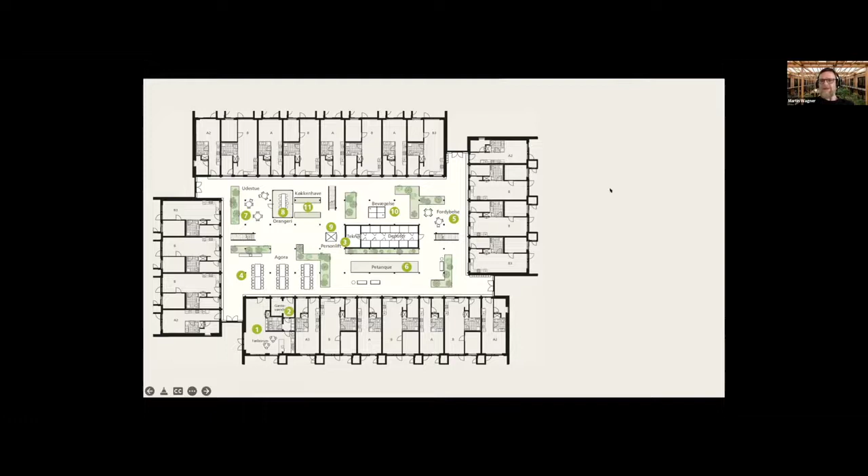So we have created small, compact, personal privacy cells, not cells, but apartments. And then we've created the big atrium garden where people can actually meet. Now, there we go. Here you can see the layout. This is a general layout, and I've just quickly translated it.

You have the common room, down at number 1, where you can have a gathering of up to 30 people. The reason we haven't made it bigger is that with a bigger gathering, you lose the intimacy. It's not supposed to be that everybody meets everybody every night. That's not the whole idea. The whole idea is that you can have small communities within the big community.

And when you have a compact apartment, one thing you lack is a guest room. You don't use it very often, but when you need it, you need it. So therefore we have a common guest room. The interactive board I'm going to skip, but then we have the Agora. And that is actually the big wide open space where you can gather more than 30.

You can have standing gatherings if you want to gather the whole community or part of the whole community, or you can have sitting gatherings where you can have guests, for instance. And then we have different zones, like the reflection zones, the lounge area, the activity zones, and the kitchen garden. Because the common area also has to be a place where you do something.

You grow your own herbs. You have the boule lane where you can play boule. And then you have the different areas where the inhabitants are actually taking care of the community. So we don't create the community, but we facilitate it by the building design.

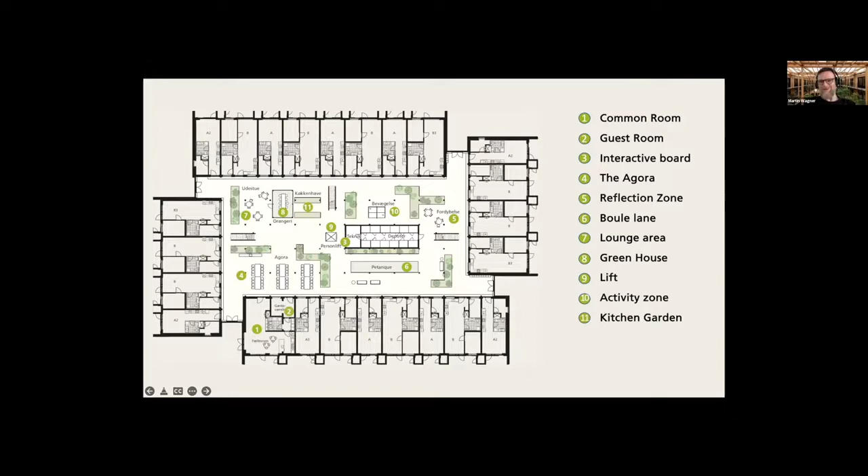All right, Morten, will you take it away, please? You're still on mute, Morten, or is it the video, Zach? Yeah, Morten, would you like me just to go straight into the video? You need to, yeah, so okay. You unmuted me, thank you. Okay, thanks a lot. And I guess from the introduction Hugh gave me, I can only fail from here.

But okay, Martin's already told us a lot about the project, and now I want to show you how the prefab modules are being built. So we've visited the prefab producer FlexModul here in Denmark, where you'll see Brian, the technical director of FlexModul, and we'll go through the production and show you how things are done. And then afterwards, we'll also visit the finished project Ibihaven. So enjoy.

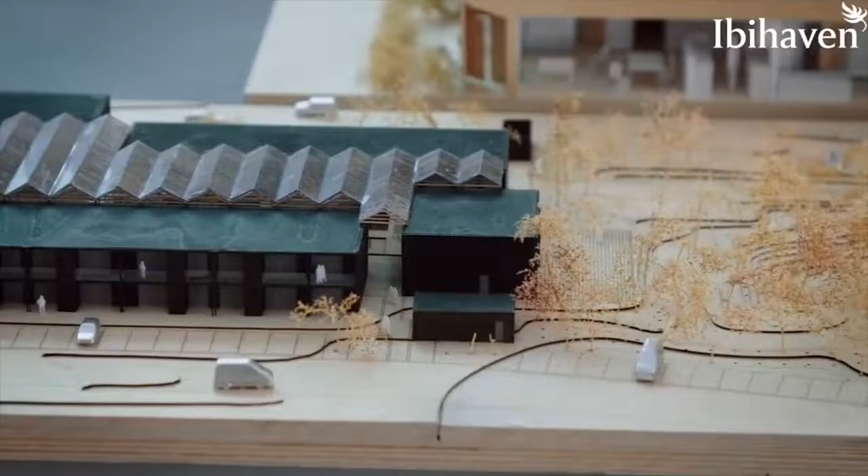Today we are here in Slagelse visiting the project Ibihaven, which is part of the bigger project called Agorahaverne. Haverne means gardens. As you can see, this is somehow an inside atrium garden. This project was built in 2020, so the people here have been here for 2 winters now and had different experiences with warm summers and a bit cold winters out here.

But inside, the different apartments are of course built as we do in Denmark. When you build and calculate your energy consumption, if you follow the standard and you build to 1.0, then you need to do the blower door test. If you build at 0.7, you need to test. If you don't test, you need to calculate at 1.5 instead of 1.0 or 0.7. And no matter what, you still need to comply.

So even though you use 1.5 in the calculation, which is kind of a penalty, you need to do something else with insulation and so on; you need to reach the level 1.0. So in this project, we have 150-plus apartments, and every apartment is tested individually and reaches 0.7.

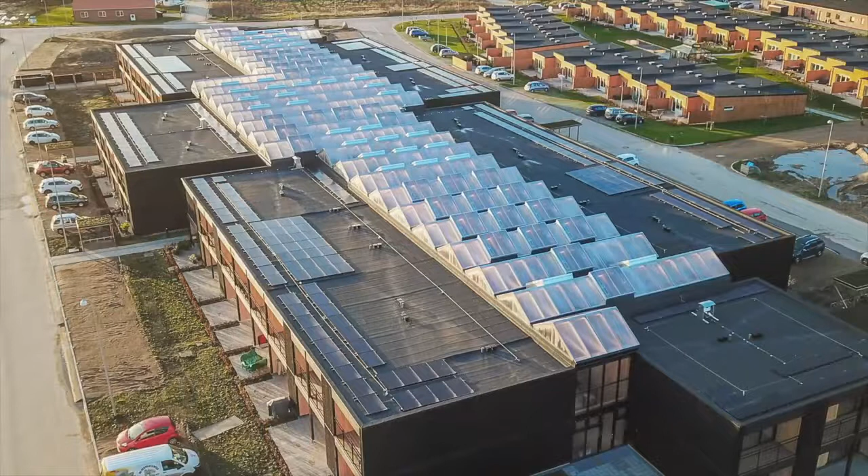Because of the incredibly low energy consumption, it's possible here to heat the dwellings only by the ventilation system with an additional heating coil. Another thing is, in this project they've installed PV on all the flat roofs, and the residents can follow the energy consumption in real time on a screen. So all the time they can see what is being used and what is being produced by the PV.

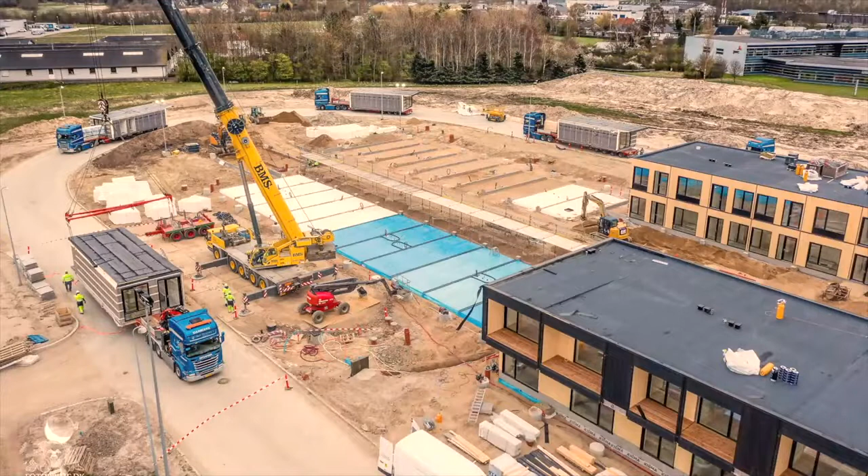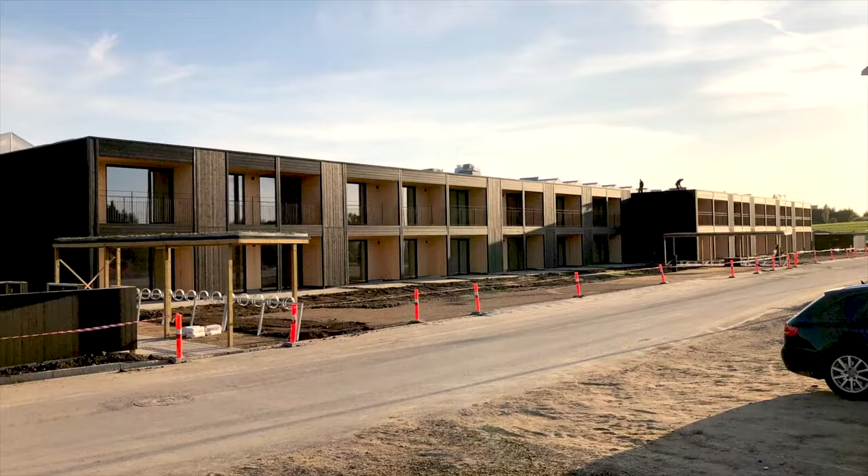And as you saw earlier, FlexModul are building these prefab modules in the factory. But they don't only build them, they also do the installation here on site. Because the prefabs are more or less 90 to 95 percent finished from the factory, it makes it very efficient also when installing. So they can actually install up to 20 modules a day.

And again, it's very efficient and, I don't know if we can call it a clean installation, but safe, because in the factory the elements are wrapped in plastic, and they drive them to the building site, install them, and then remove the wrapping just before putting the second or second and third floor on the ground floor. So you have no problems with rain coming down and so on. It's a very dry installation as well.

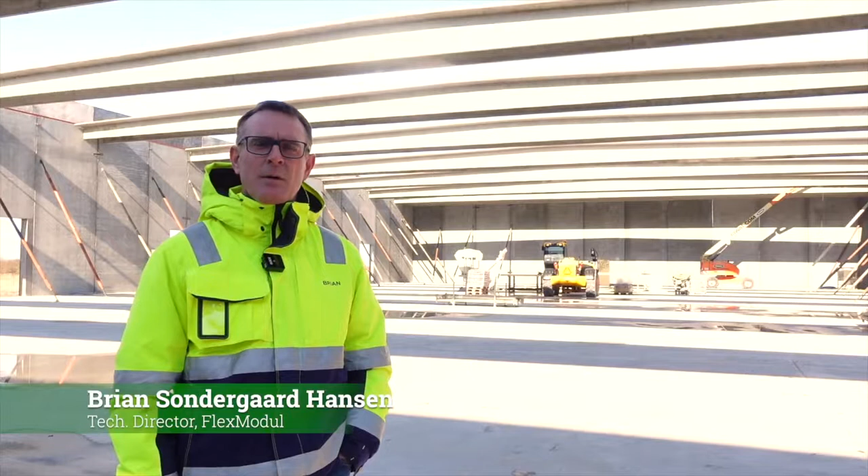I'm CTO here in FlexModul in Vinderup. We are producing prefabbed modules and using timber most of the time. You're here in our new production line where we have increased our capacity to 500 to 600 modules per year, and we'll be ready per 1st June this year.

I've been working with modules for 10 to 15 years now, and I started here in FlexModul in 2017, and we started our first line production in 2019, and we have been increasing the production ever since. We are expanding our production of prefab modules because we're seeing the market is going up, and we are experiencing our customers having bigger and larger projects.

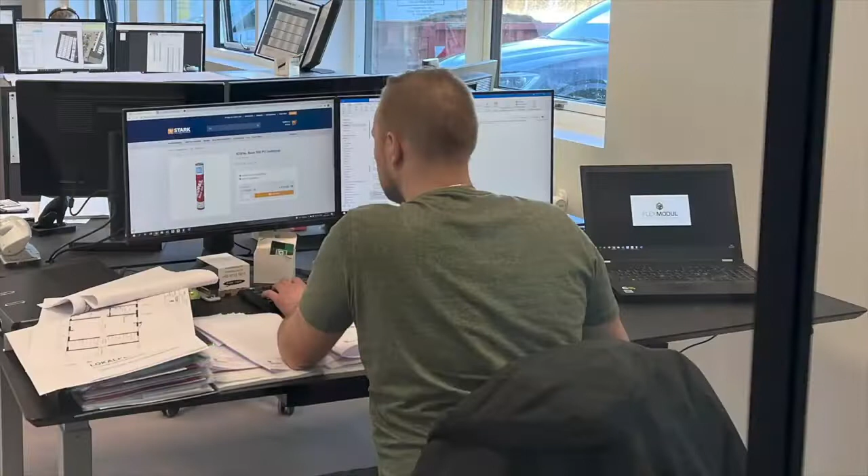We see a lot of projects at the time going to apartments. It's a big trend to be doing this with wood, and if you're doing it in an environment like this, it's controlled and there's a big quality with a lot of standardization. We have a customer in Copenhagen, and together we are producing thousands of apartments over the next 5 years. The sizes for the projects are from 15 to 18 apartments. And this is called Agorahaverne.

We are not so much cheaper anymore as when we started the journey, but we are faster. So we are producing the modules while you are on the construction site doing the concrete. So we are faster today than traditional construction. We are about 20% more efficient than if you're doing it traditionally. It's definitely increasing, and the trend is going up.

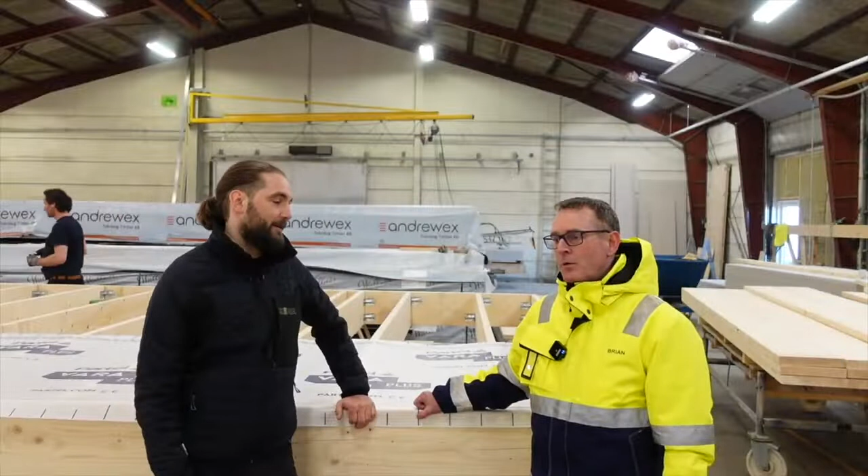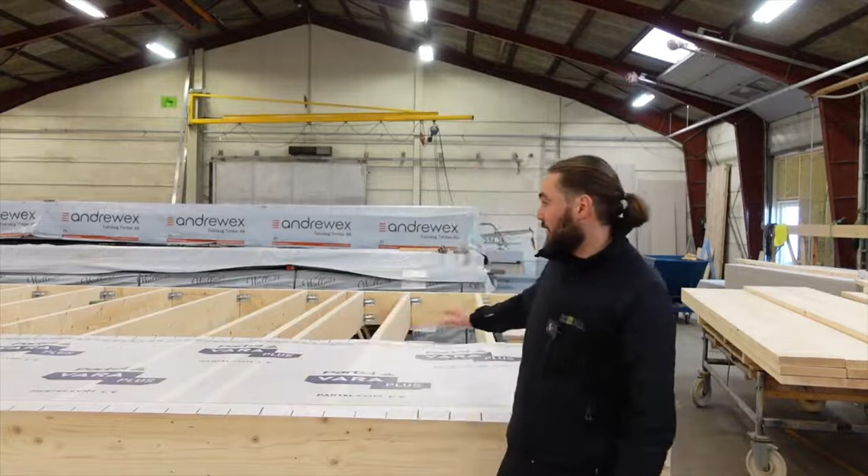Pro Clima is a professional partner for FlexModul and has a lot of knowledge about airtightness, products and solutions. We are in the production facility here at FlexModul. This is the place where roof elements are being made. Right here, they're ready to install the Vara Plus intelligent vapor barrier. The guys here are very good at their job, but also keen on doing a good job. Very focused on making this layer airtight.

First of all, you'll see that they only have 2 joints on the whole element. They only use staples out here, and every place where they have a staple, they afterward cover it with wooden construction. This is a flat roof construction. In this project, it's a non-ventilated construction, and that's why they're using the intelligent membrane.

In general, you could consider that a flat roof would be more critical than a pitched ventilated roof, but building them inside, very dry from the beginning, we make them very safe, and since the quality here at FlexModul is so high, you would also know from the beginning that the element itself is very, very airtight.

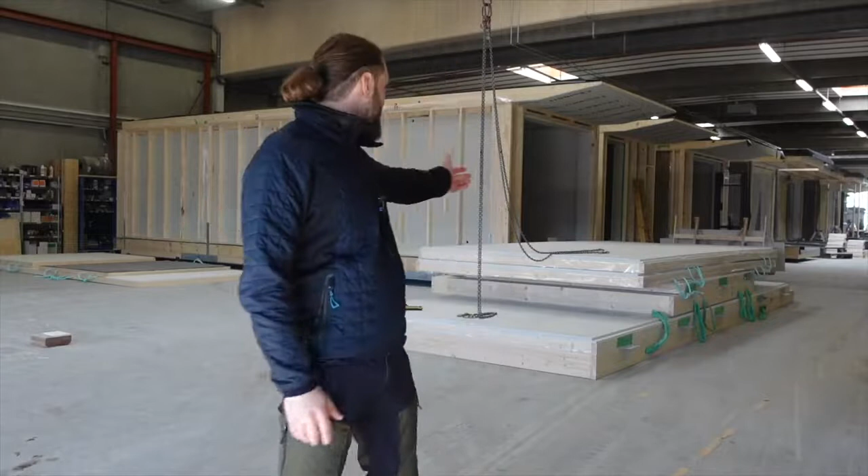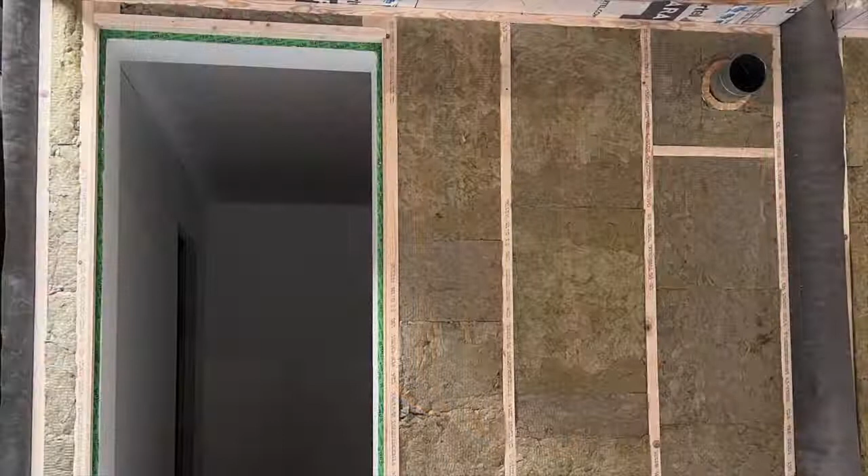And this is actually also the place where focus is also on airtightness. After the first station where the floor, walls, and roof are assembled, we've got the next stations where they insulate from the outside and start working on the inside. Then a couple of steps down, they're starting doing the walls from the inside with plaster.

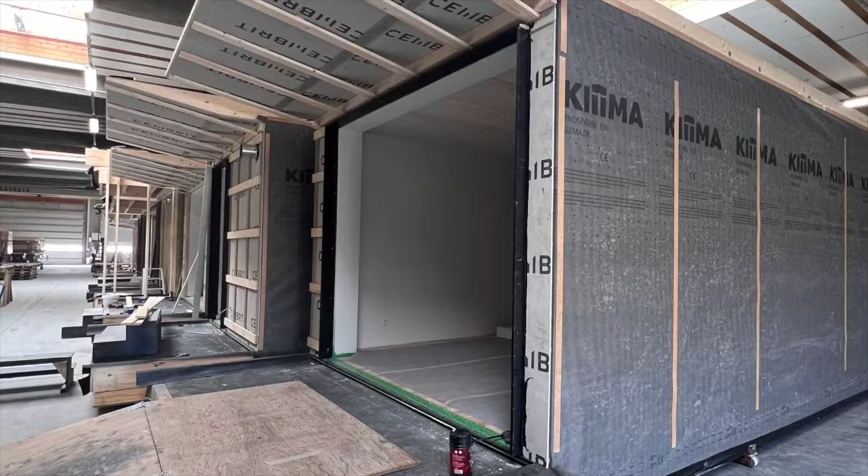At the different stations, as I said, they start insulating from the outside, then start working on the inside as well. Then they put on a membrane from the outside. At the same time on the inside, they're doing skim plaster. Next station, they start doing the painting. Then we go a bit further down. They start putting in the kitchen. Actually, in this station, they also put in the bathroom pod.

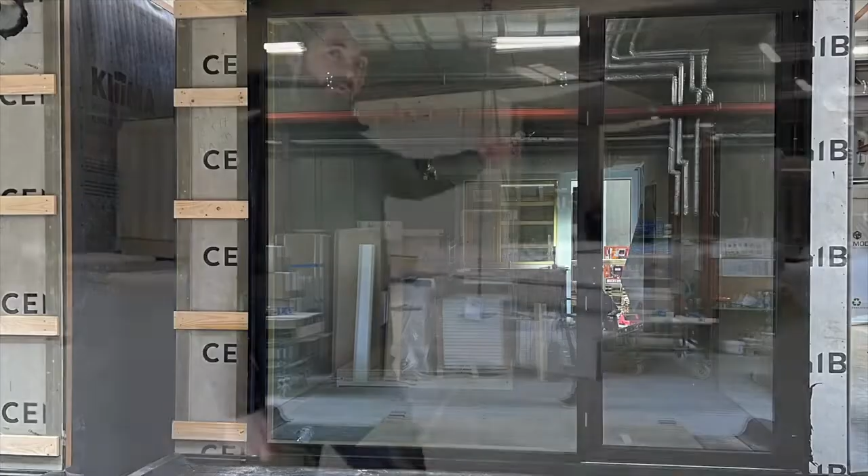When we come to the fourth, we see that they have already installed boards on the outside, and then they install windows and doors. So we're here in an almost finished module, actually already wrapped from the outside.

But what we can see here, apart from it being almost done, is the heating system. We've got no floor heating; instead we've got, you can't see it inside, an air-to-air system. So the whole module is only heated by air-to-air.

And then again, maybe you can't see it, but over here we've got a small radiator, because in Denmark we've got rules that you need to be able to turn the heat up and down in each single room. So even though it might not ever be used, we've got a small electrical radiator over here.

Again, what we've been talking about with air tightness, we've been working with air tightness in Denmark for many years. Back in 2006, it was introduced that the air tightness should be no more than 1.5. Later on, we had different building classes, so it should be more and more airtight. A few years ago it was changed, so the maximum is 1.0.

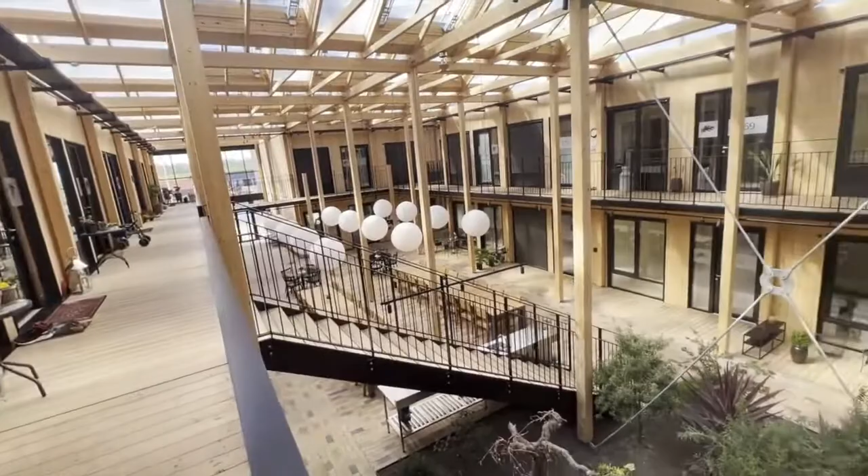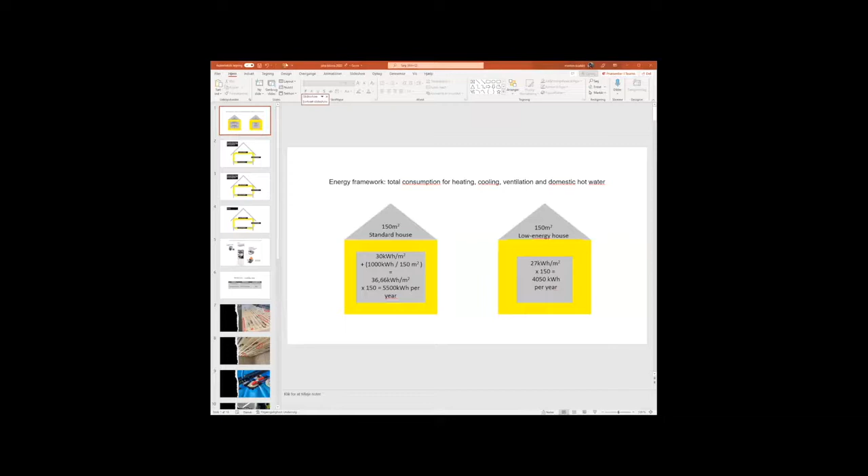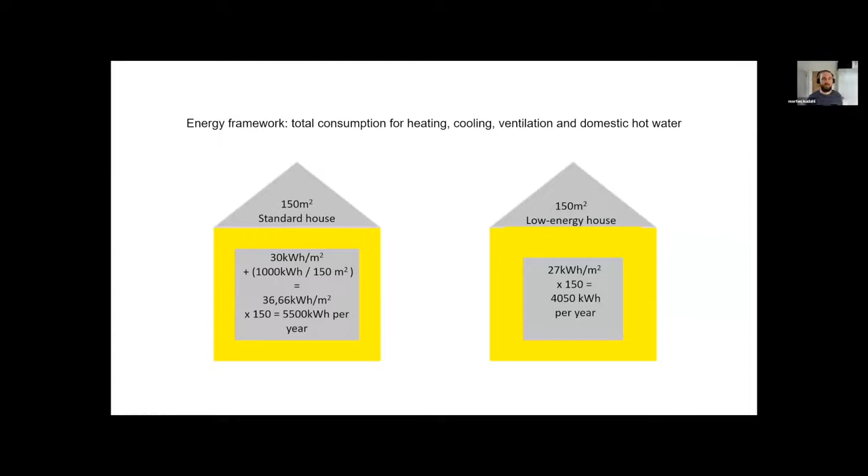Good. Okay, so I've, can you see it? Yes. Good. So I've made a small PowerPoint presentation as well. I guess in the heat of the moment, a couple of things were said that weren't totally correct, but I'll try to do my best.

I'll just talk a bit about the Danish building code, a bit about how the air tightness is done in a project like this, and show a couple of pictures as well. So in the Danish building code, we have this energy framework. The energy framework tells you, as it says here, the total consumption for heating, cooling, ventilation, and domestic hot water. As I also mentioned in the video, we've had some different classes the last 15 years.

Right now either you have a standard class, or you can go to low energy house. The standard is what you need to do. You need to address the rules here, and then you can choose for yourself if you want to go lower. If we have a standard house, this is just an example, 150 square meters, the standard says that for your total consumption, you can use 30 kilowatt hours per square meter, plus these thousands divided by the heated floor area. So in total in the 150 square meter house, you'd have 5,500 kilowatt hours for the total consumption per year.

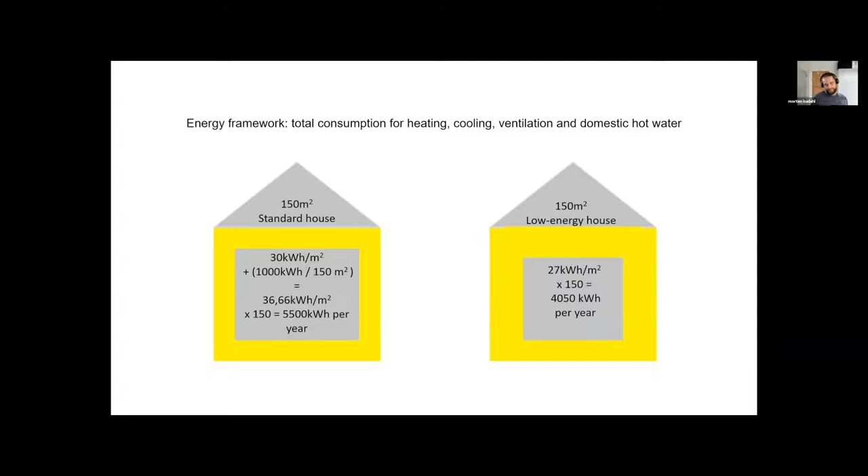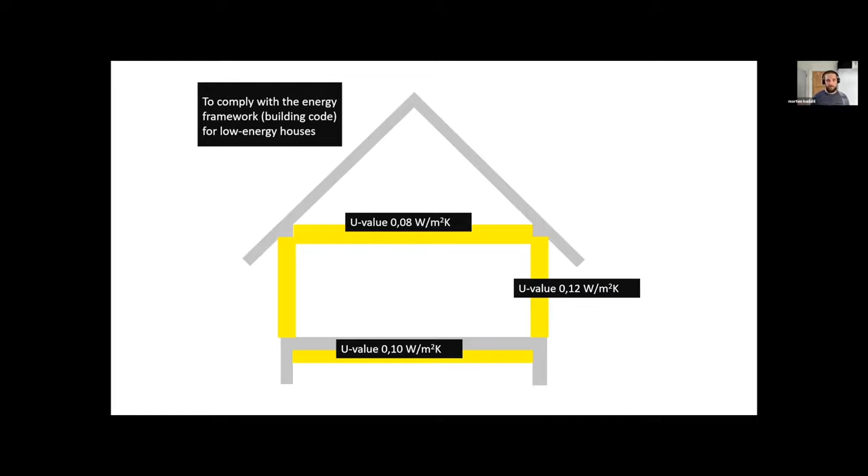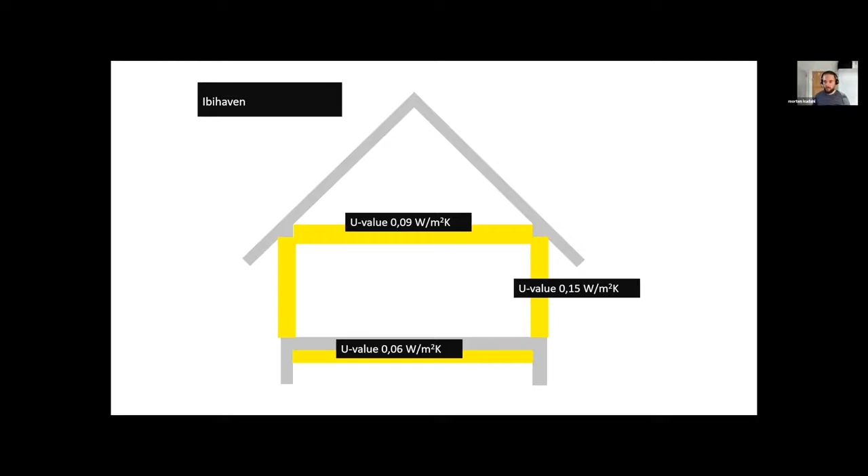In the video, I talked as well about how to heat these apartments. It is a combined system. So you have ventilation, where you've also got your kitchen hood included. And as I said in the video, you'd have this extra heating coil for your peaks or lows, so to speak, in the winter when it's really cold. Then you'd need a little more heat, so that's where you got the extra coil.

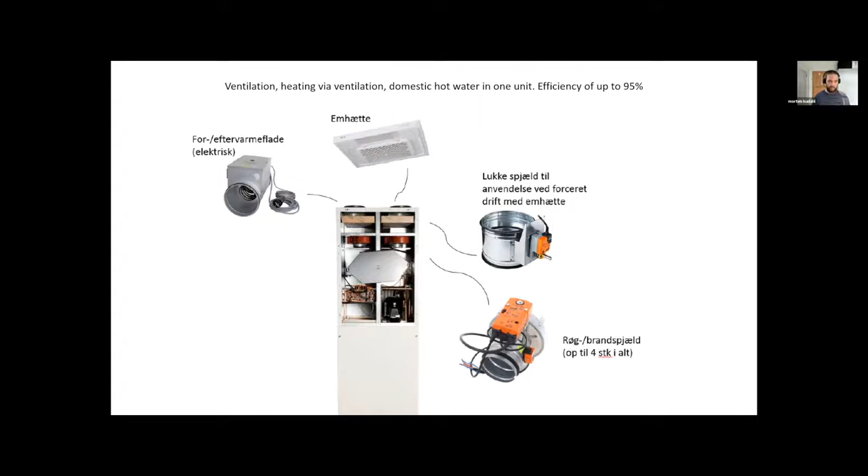It's a quite big system for a small apartment, but this is getting more and more standard in all these projects. And as you see, it's a very efficient system with an efficiency of up to 95%. Also talking about air tightness. As mentioned, when we do our blower door test, in the standard house we'll be at 1.0. And according to the building code, 10% of all new buildings should be tested.

As I also mentioned, if you don't choose to have your building tested, then you need to calculate it with 1.5. So this makes almost everyone have their building tested, so they can calculate with 1.0. And again, if you go to a low energy house, then you're at 0.7, and everything needs to be tested. So as I mentioned, all the apartments in the Ibihaven were tested.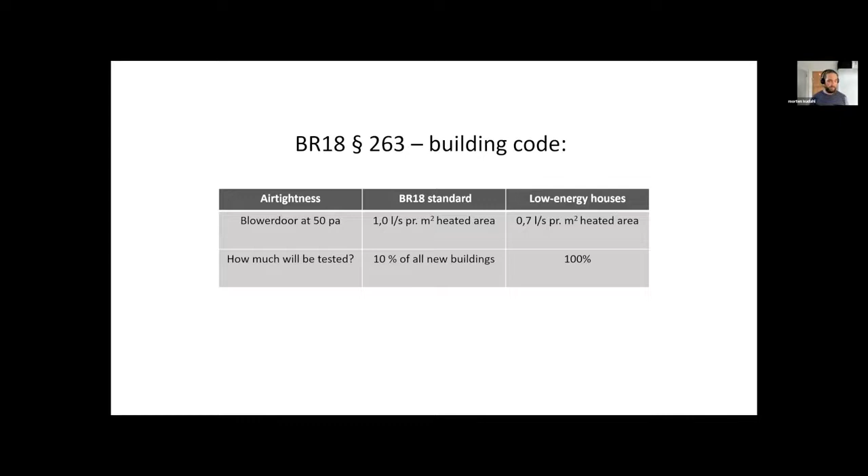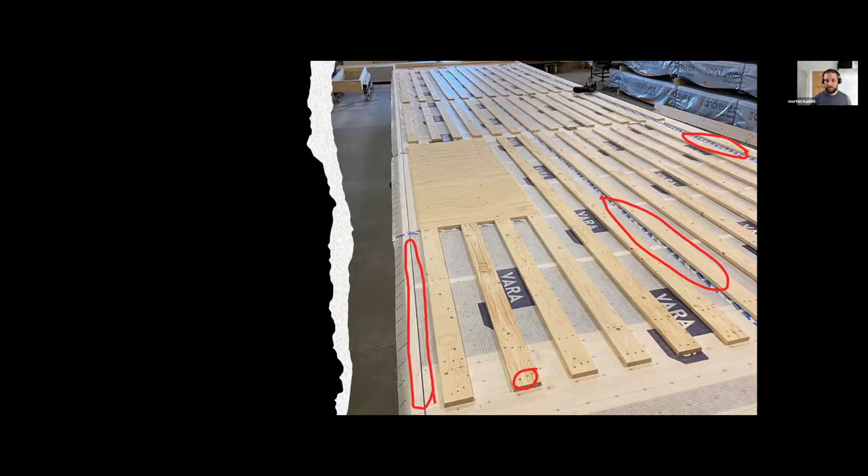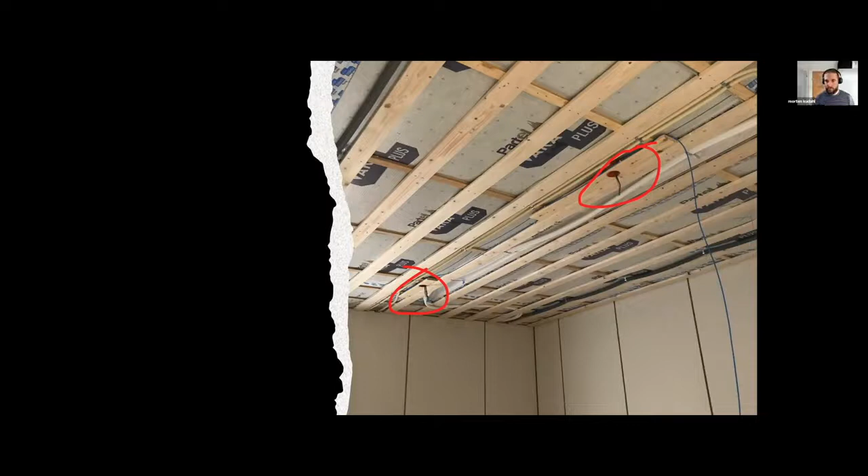Here the staples are also covered by the tape. So actually the only penetrations we have are by the nails. And of course we've got a lot of nails, but this connection is totally airtight. When we have penetrations of pipes and so on, I haven't been able to show it to you in the roof element, but we've got a slide here. All the installations will be done beneath the airtight layer, so you've got no penetrations here. As you can see, there's this installation layer. So again, a very safe construction.

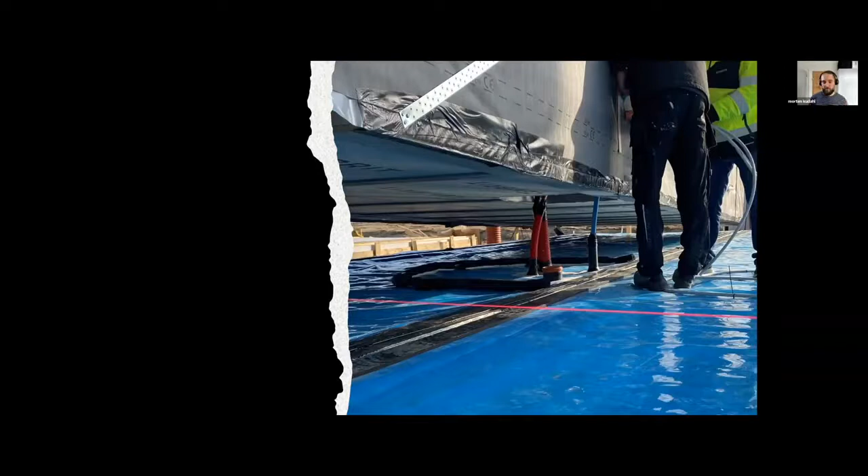So now, this is not the roof element, but here we're at floor level. This is done on the building site, where we use grommets, or this is a 1K liquid applied sealant. If you look here, every time we have a penetration, we do grommets of some kind.

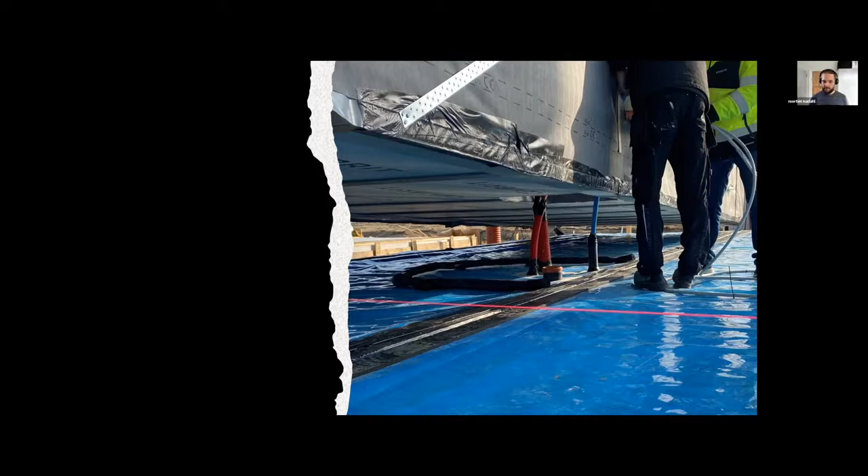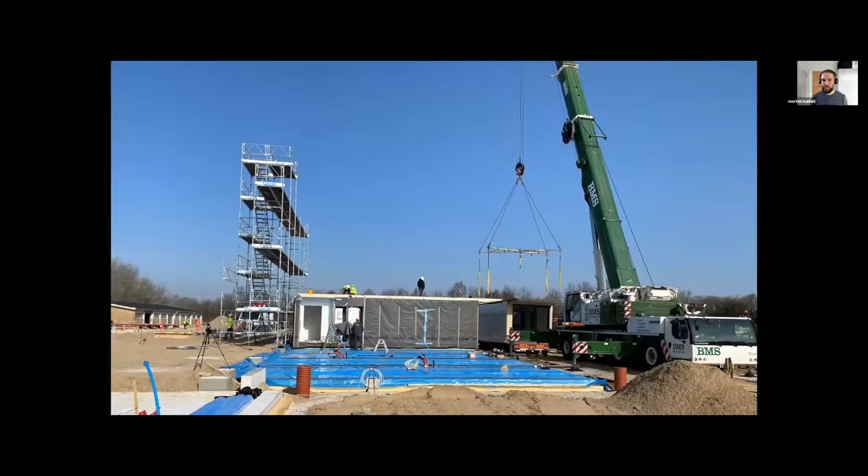This is a picture that shows you where all the installations come into the module. And then we will have the connection from the airtight layer, the blue layer here. Then we install the module, and afterwards you can see the vapor barrier coming from the wall, which will be connected to the airtight layer beneath. I've just got a couple of pictures from, this is actually not the Ibihaven, this is the current project called Sofushaven, also in Slagelse.

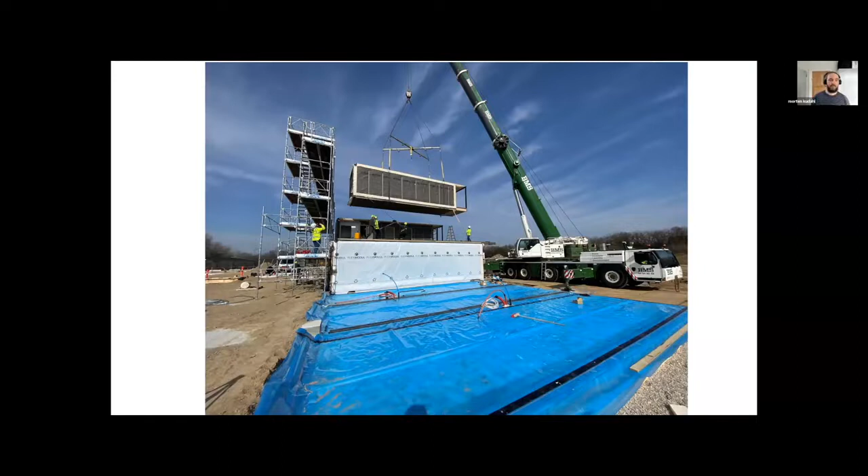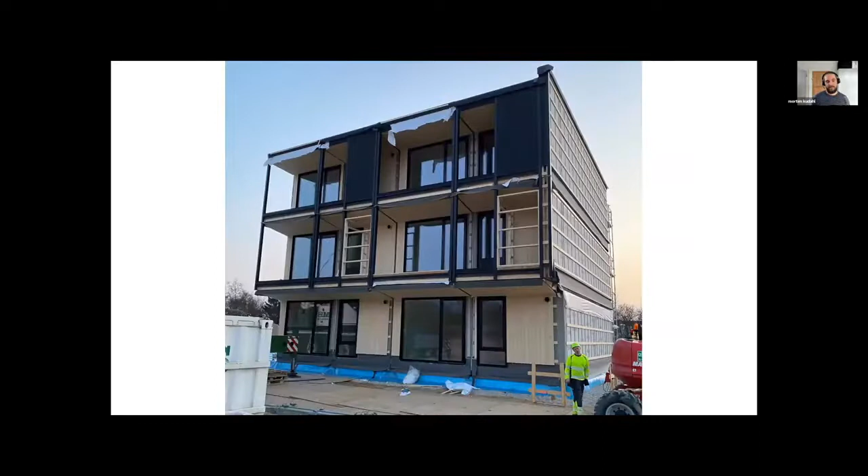Again, it's the installation of the modules, but I also visited this site the other day to see how the craftsmen are working with the air tightness, and we've been looking at different solutions to make the buildings even more airtight. So as I mentioned, clean installation, of course these days the weather's very good, no water coming down, but just to show you how fast it is, this is the same day. So at the end, they had these 12 modules installed. Over to you, Hugh.

Thanks, Morten and Martin, for your equally detailed and really interesting insights into your respective areas. I'm more used to the air tightness, but Martin, it's certainly interesting to see the process of how things came together. I was lucky enough to see and experience the project, and I agree with everything that's been said. It feels fantastic when you step into the atrium. I love the term teenagers. It fits, and it's clear that it's kind of a missing link, a gap between care and that time where we really don't need that large house. On the project itself, I love the efficient use of CLT, so not full wall panels, only what's needed.

Overall, there's not many people doing what FlexModul and Tetris are doing. It's absolutely possible to finish houses to that level in the factory. When I see the factory and each station has the materials it uses right beside it, it's perfect and logical. It all looks uncomplicated, and that's the aim. When you go to a construction site where everything looks complicated, there's generally mistakes and issues. So a huge hats off to you for that. And the project itself is super sustainable and really an example in lots of ways. From speaking with you, Morten, the base standard for air tightness and insulation, I had to let you know that isn't normal.